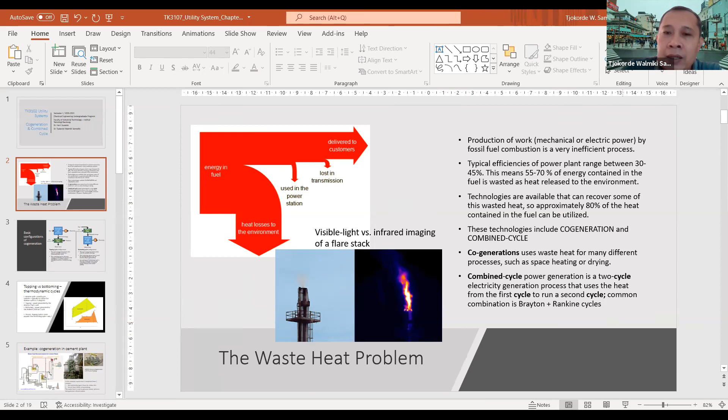Right, and that's what we do as engineers. We have to work with compromises. We frequently have to work with conflicting constraints. All right. So with that thinking in mind, let us take a look at these interesting technologies: cogeneration and combined cycle.

So as you have learned in the previous chapters, production of work, which can then be used to drive other equipment or to generate electric power, by fossil fuel combustion is largely an inefficient process. The thermodynamic efficiency for power plants typically ranges between 30 to 45%, which is pretty lousy actually. This means that between 55 to 70% of the chemical energy contained in the fuel is wasted as heat released to the environment in one form or another. So only less than 50% of the energy contained in a liter or a kilogram of fuel can be used to generate power or mechanical energy. That's pretty bad.

So we are motivated to develop technologies that can recover some of this wasted heat, so that approximately 80% of the heat contained in the fuel can be utilized. If we include all of the energy-saving and waste heat recovery technology available today, we can get about 80% of the chemical energy contained in the fuel. That's very high, actually. These technologies include cogeneration and combined cycle. Now, these are two different terms. Even though the process equipment is quite similar between the two, they are designed for different purposes.

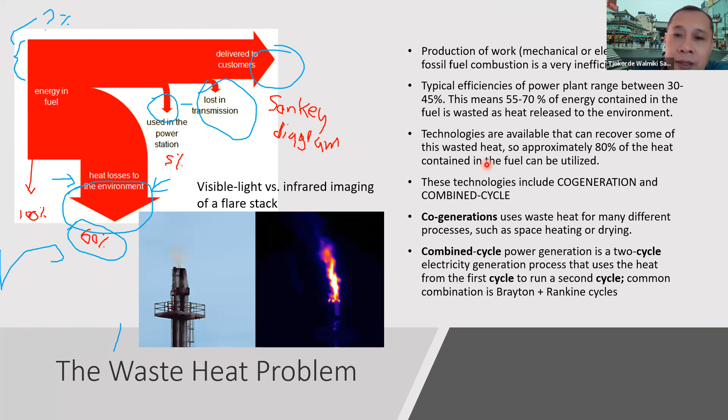What I'm hoping to convey to you is, we need to appreciate, we need to understand the amount of heat that we need to release to the environment and the need to reduce it as much as possible. Okay, so this is from just one flare. You can imagine how many flares are there in the world, right? So this is not good for the environment. If we can extract as much waste heat as possible from a process, then it will be better for the environment. Okay, and that's what we do with these technologies.

Okay, so let's take a closer look at cogeneration. These are the two basic configurations of cogeneration technology. The left-hand side is called a topping cycle, and the right-hand side is called a bottoming cycle. Now, before we go to the detail here, let me show you really quickly why we call them topping and bottoming cycle. So, as I mentioned, in a cogeneration process, you're using only one thermal cycle.

So again, please note the main difference between cogeneration and combined cycle: as the name implies, in a cogeneration technology, we only use one thermodynamic cycle. Typically, it is either Brayton or Rankine cycle. Sometimes we can also use diesel cycle, but it's not very popular. So we can either use Brayton or Rankine cycle.

Now, if we draw those two cycles in the same TS diagram, temperature versus entropy diagram like this, then the Brayton cycle, with a typical condition for a real life Brayton cycle, oftentimes will sit on top of Rankine cycle. It operates at higher temperature compared to Rankine cycle, that's why it sits on top of the Rankine cycle.

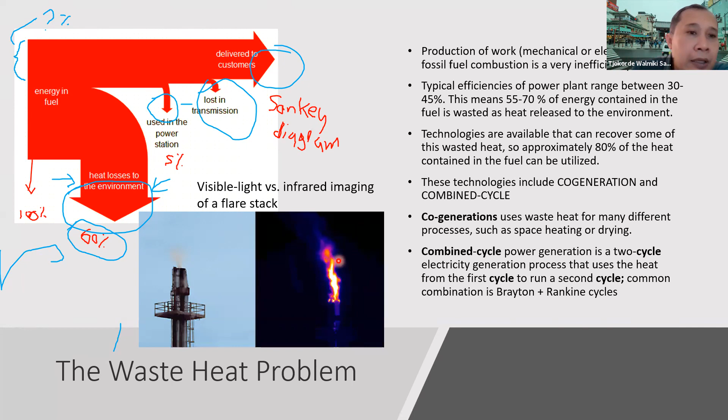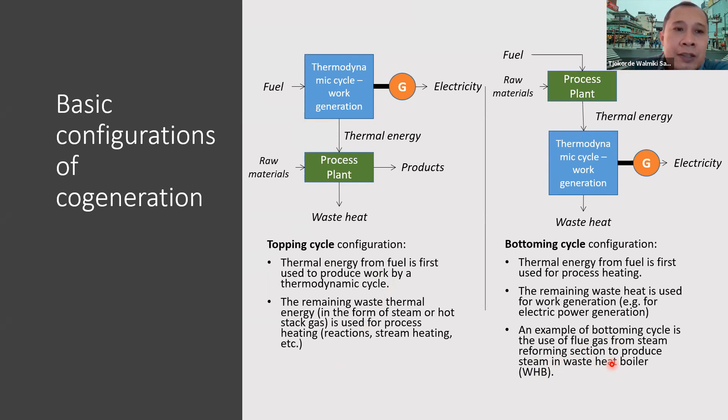Okay? Because flue gas from the steam reforming section is actually very, very hot. It has a very high temperature, and you will most definitely violate environmental regulations if you just eject the hot gases from a primary reformer to the environment. So one of the ways to reduce the temperature and also generate energy in the process is by using these WHBs. Okay.

All right, we have discussed this one. This question here, I'm gonna save this as your own exercise. Okay. Do search for this on the internet or in your references anywhere: the reason why topping cycle is more popular than bottoming cycle. Why around the world there are more topping cycle plants compared to bottoming cycle plants. Okay, so there's an easy explanation for this.

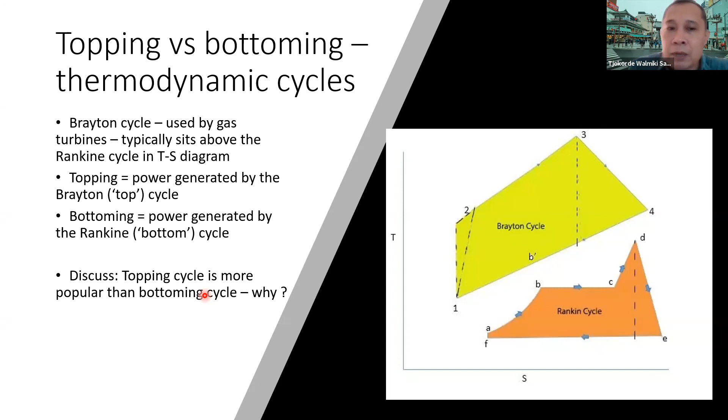So this is what we call a self-study portion of your class. You're university students, you're no longer high school students, so you are expected to be more independent, more self-motivated in learning. So when we throw questions like this, don't just leave it like it is, but try to explore why. Try to find the answers to these questions. We're throwing breadcrumbs to you, and this is a good way to learn to really understand the concept of thermodynamics and how they apply to real-life chemical processing plants, or also power plants.

Yeah, by the way, don't get confused between a power plant that is designed as an integrated part of chemical process plants versus a power plant that stands alone, operated by PLN, for example. Oke, ya, jadi jangan bingung.

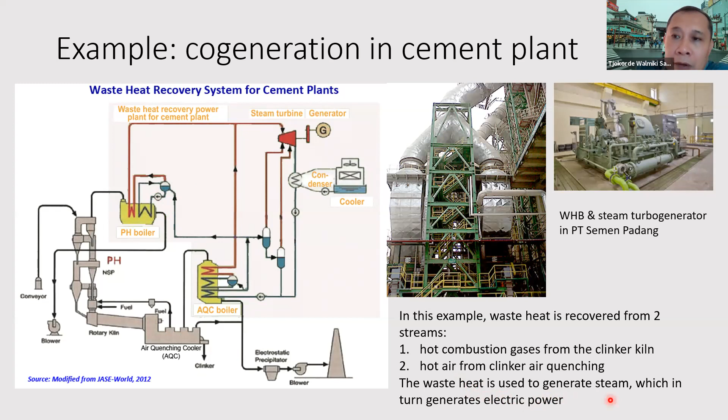Okay, so the waste heat from the AQC boiler, from the air quenching cooler and from the suspension preheater is then used to generate steam, which in turn generates electric power. Okay. So that's a very nice way of utilizing, of minimizing waste heat.

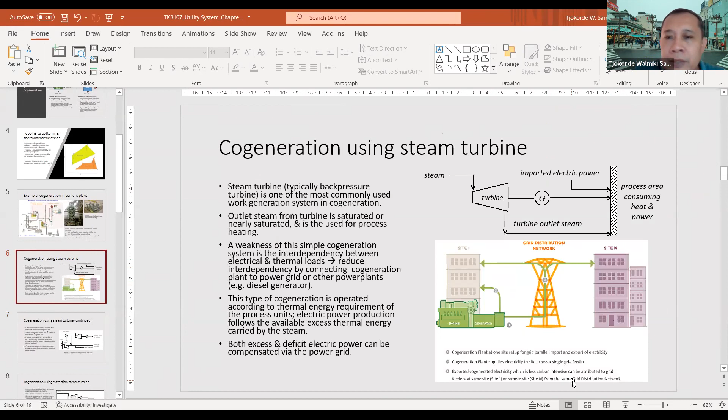So wait, let me check where we are right now. All right, okay, good. So my plan today is to finish at slide number 9. So we are now at slide number 6. That's fine. That's all right. We don't need to push it if we cannot. Okay. Just feel free to jump in if you have any questions. Just interrupt me if you have any questions.

Okay. The next one is now let's take a look at some more specific technology for cogeneration. So there are several ways to perform this cogeneration. The first one is using steam turbine. To be more exact, back pressure steam turbine. So back pressure steam turbine is one of the most commonly used work generation systems in cogeneration. The outlet steam from this turbine is usually saturated or nearly saturated, and is used for process heating.

Now, remember from your thermodynamics class or from our discussion on steam distribution system, if we want to use the steam for heating purpose or thermal steam, then it is the latent heat of the steam that we use, not the sensible heat. So a suitable state for a thermal steam is, of course, saturated or nearly saturated. Because we don't want the sensible heat. We want the latent heat of the steam to perform the heating.

So here, what you see here, the steam is fed to the steam turbine, and as it drives the turbine, it generates electricity. So this is an electric generator, and then the turbine outlet steam is used as a heating media. And this is the process plant that receives the combined heat and power from the power plant. And typically a chemical processing plant still needs imported electric power.

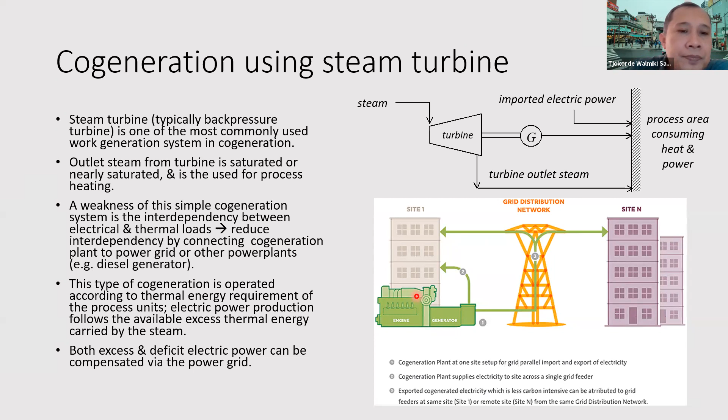Okay, right. So if there's a steam deficiency in the process, so if the plant needs more steam, then the steam pressure decreases because more steam is being drawn by the process.